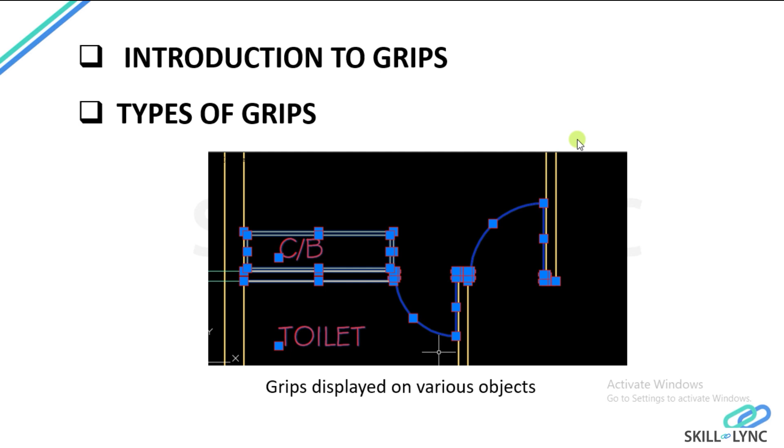Now we will be introducing grips, what grips are and what types of grips are there in AutoCAD software. Grips are points which are displayed when you select an object. You can see there are various objects in this screen, representing doors, cupboards, walls and other things. These are selected in the AutoCAD window, and when they are selected, various points are displayed. You can see those blue points in the drawing—these are called grips. Grips have 3 states, and we will be talking about these grip states, how they can be used for editing, and what the 3 types of grips are.

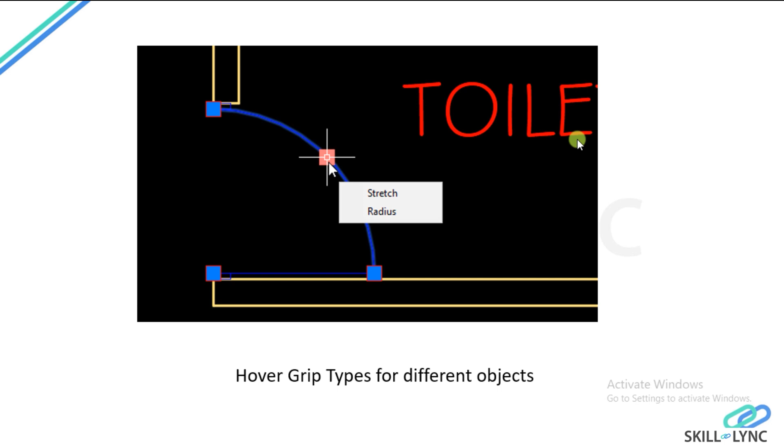Once we have selected some object, like this door type object, when you hover your mouse over any of the grips, it basically becomes the selected grip—we call it a hover grip. It's not about selected grips; when you hover the mouse over the grips, it is highlighted. Let's see how this is performed in AutoCAD software. So here we have this drawing, with some content in it.

There are entities here—let us select this line. After selecting this line, you find that there are 3 grips displayed on it. This line represents a wall in our architectural drafting, and these points are grips. When they are not selected, they are called cold grips. If you hover the mouse over any of the grips, you will find that the color changes, indicating it is now a hover grip, which means it is ready for editing. So now if you want to edit it, just click on the grip, and there are various options you can use to edit it.

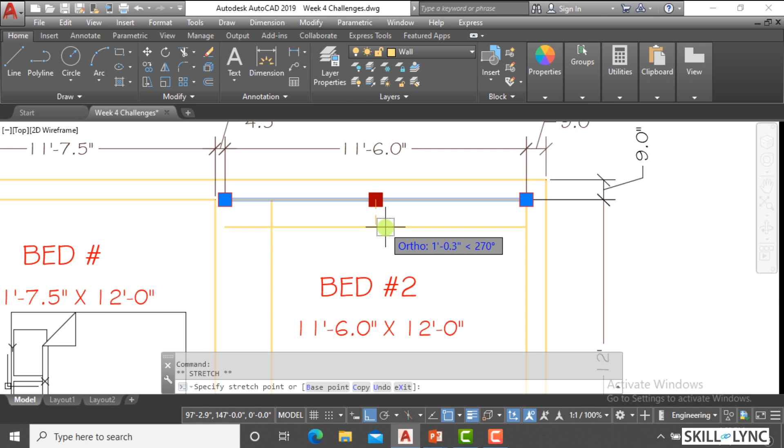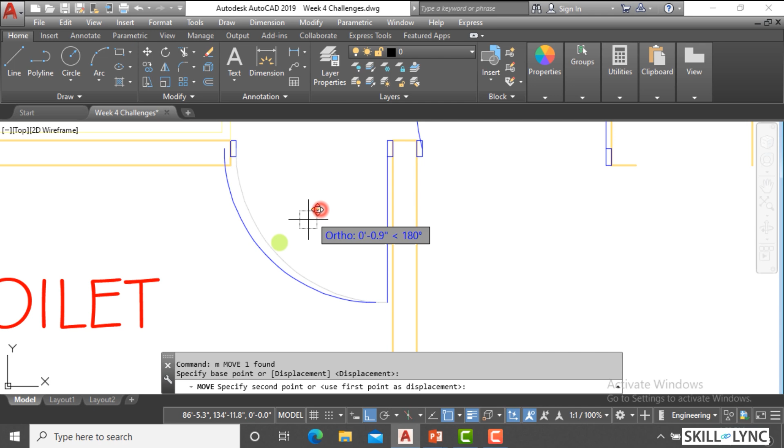Now let's go to another object—this arc object. Let's select the arc object, and you find there are 1, 2, 3, 4 grips here. There is a grip for the line and a grip for the arc. The moment I select the line, more grips are displayed. Let's see if I select only the arc. I'm moving this arc a bit so you can understand what grips are displayed on it.

Let's say I put the grip arc here. Once you select this, you find there are 4 grips on this arc—2 grips showing the endpoint proximities of the arc, one is the midpoint, and the other is the center. You can also see some border lines here, called contours of the grips. We will see how we can edit the color of the grips, edit their function, and use them for various editing purposes.

So now to conclude, grips have 3 states. One is the state in which it is not selected, which is called a cold grip.

The second state is when you hover the mouse over any of the grips, the color changes, so it is called the hover grip. The third stage is when you click on the hover grip, it becomes selected for editing, so this is the hot grip or the selected grip.

You can see that there are certain colors which are displayed. So if you want to change these colors, type OP in the command prompt. The Options dialog box will be displayed, and in this dialog box you have to see that the Selection tab is displayed, where there are different areas for changing the settings.

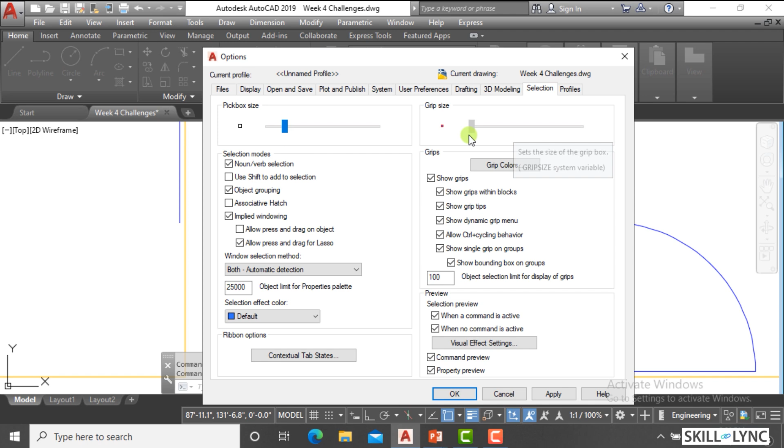First is the grip size area. This particular slider increases or decreases the size of the grip. So let's say if I increase the slider and press Apply and then OK, and you select it, you see the grip size is increased. Now let's say if I want to reduce the size, go to the Options dialog box by typing OP in the command prompt, and then you can reduce it.

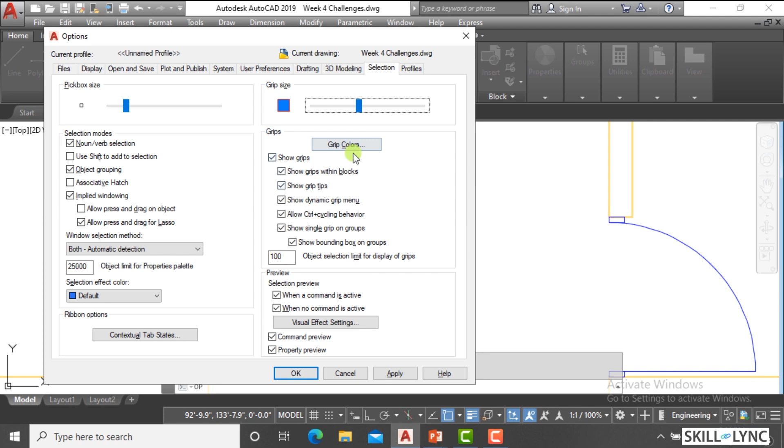Next, in the Grips area, you find there is a button called Grip Colors. If you click on this, you see there is a settings area with 4 drop down lists. The first is the unselected grip color, and by default color 150 is assigned. The unselected grip color is the color of the grip when the object is selected but the grips themselves are not selected.

Let's say I make it a color called cyan. What will be the effect? So I apply it and OK. If you select this object, you see the color of the unselected grips turns to cyan.

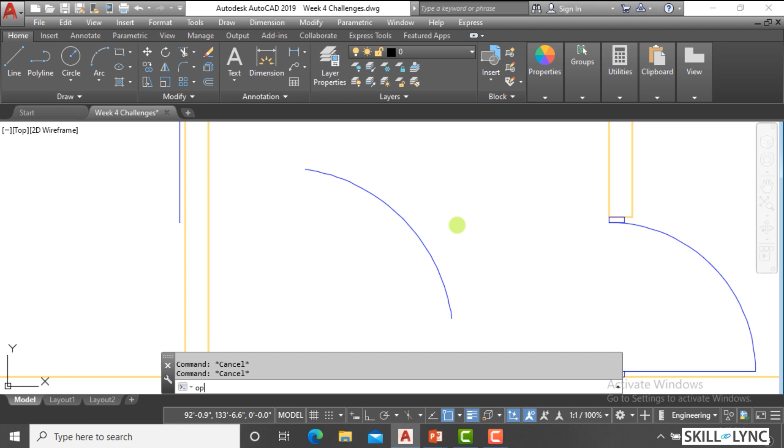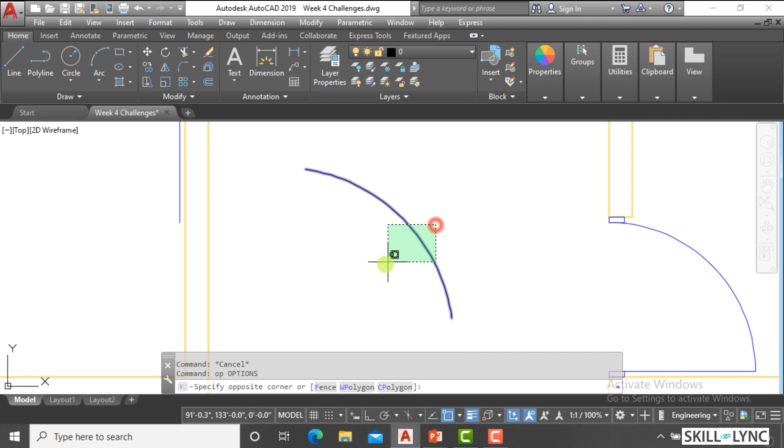Now let's quickly change some of the colors. So I give the hover grip as yellow, selected grips as blue, and the grip contour - what is the grip contour? We will see that. Let us put it as, let's say I want to select more colors, say I give it as color 241.

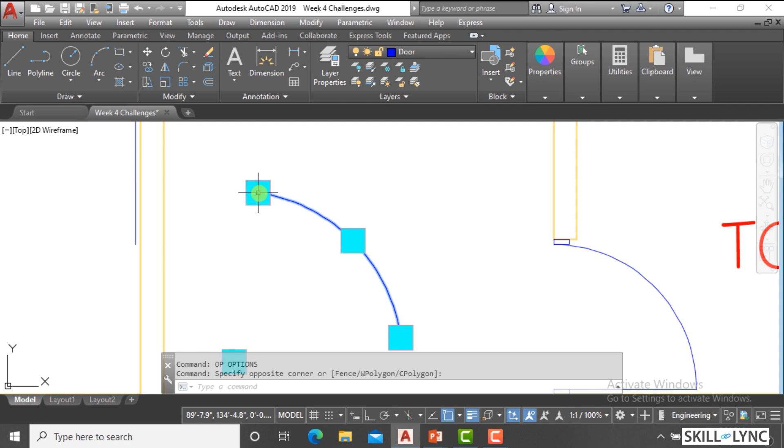So now when you select this particular grip, you find that the color of the unselected grips is assigned to what you have set, and the moment you hover it, it turns to yellow, and you can see the line bordering the grips - that is the grip contour. Let us increase the size of the grip so that you can see it more clearly. So the grip size increased - now select the grip, and you can see that those colors are very dominant and visible.

Next, let's reduce the size. So we talked about the selections in the Options tab - the grip size and the grip color. We have already covered the unselected grip, hover grip, grip contour color, and the selected grip color.

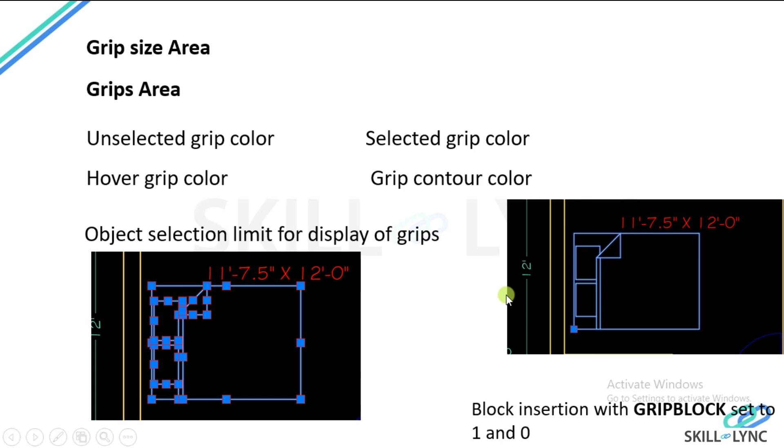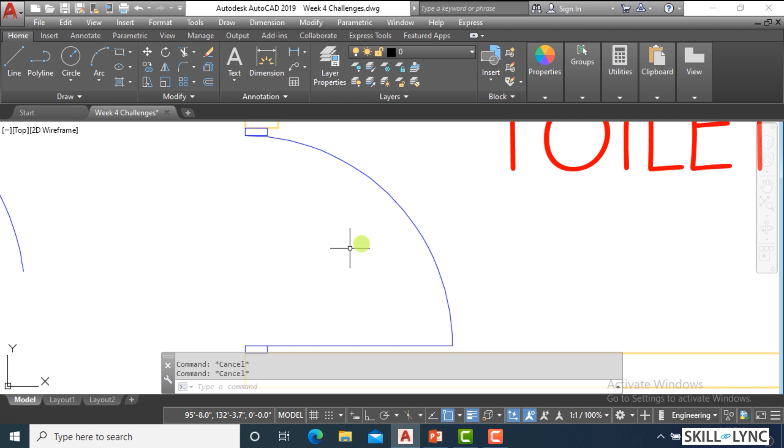So there is something called block insertion with grip, with GRIPBLOCK set to 1 and 0. Blocks are defined objects. Let's say if I convert this into a block - let me do it first, and then we will insert it just for your reference. So I am changing this into a block, I name it 1. Now you can see this is a block - basically a single object.

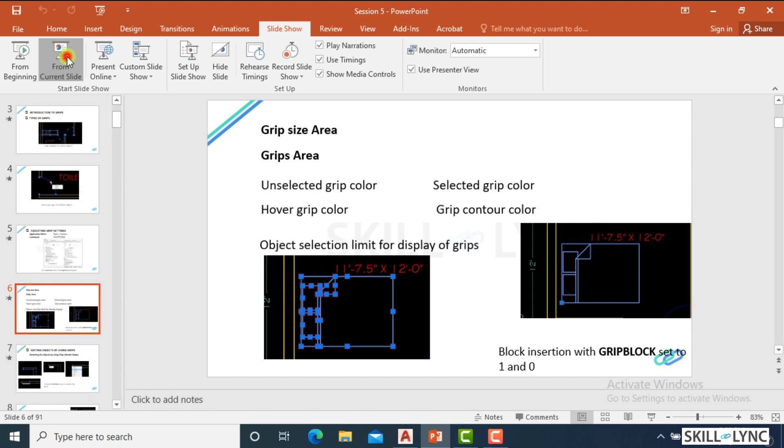Now you can see the grips are displayed in the block - this is a block and the grips are displayed. Now you can control the grip display by the GRIPBLOCK command, setting it to 1 or 0.

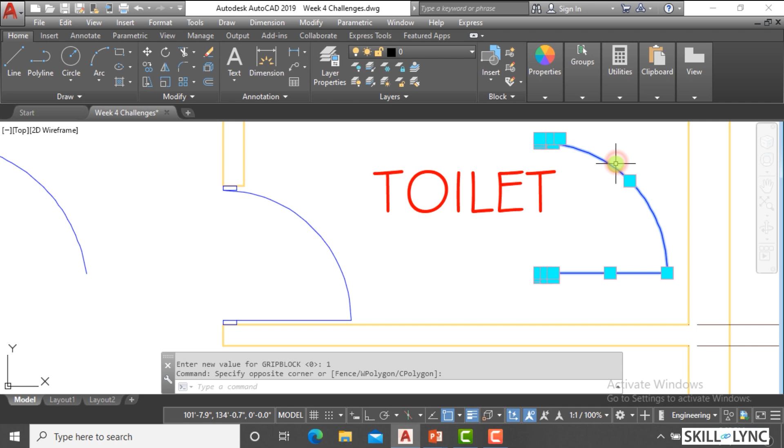Let's see what the GRIPBLOCK command does. Type GRIPBLOCK, enter. If you press 0, what will happen? Now if you select the object, only one grip will be displayed - that is the insertion point. So if I use this command and make it 1, then in the blocks in the CAD project, the grips will be displayed as they were in the original object.